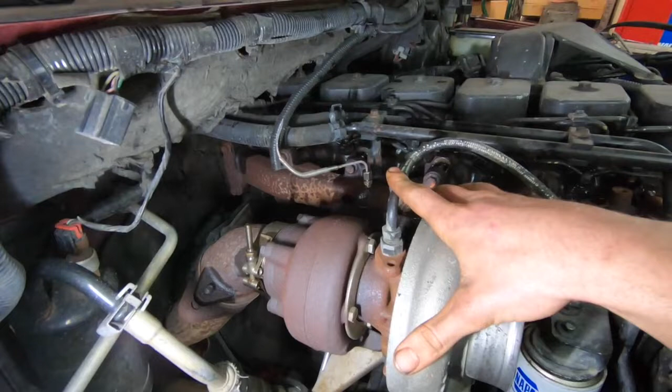So a couple things here on the turbo. We've got our feed line, and then our drain line down here that we have to take off. And then we have our V-bands here and here, I believe those are 11mm. We're going to take those off, and then I believe there are 13mm bolts that actually hold it to the manifold. Then we're going to unplug our wastegate and go from there.

Okay guys, first things first here, we're going to start on this side of the engine and get this turbo pulled off. In here we've got 11mm on these V-bands. Typically almost every V-band is 11mm, just for future notice. So we've got the 11mm down here and an 11mm over here on the exhaust. We'll start by getting those off.

Now that we got those off, what I typically do is take the clamps all the way off, the nuts all the way off the clamp. Makes it a lot easier to get them to separate. So we got our exhaust separated there, and we got our compressor side here. This is also O-ringed, so we're going to need a new O-ring for that. I also unplugged the wastegate off the bottom, it's just a little vacuum hose that pulls right off.

All right, so now we're going to break this 5/8 nut loose here on the old feed line, get that off there, and swing it out of the way. There's a little sealer washer in there that we're going to want to make sure we replace. Just swing that out of the way.

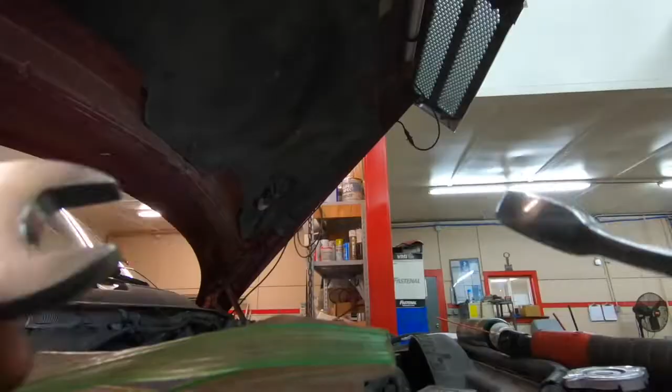So a little trick on these guys. This is actually a 15mm on these bolts that go into the manifold. Little trick here: you can hook your wrenches together like this, and it gives you some more leverage. So you hook your wrench together like that, bring it in here, hook it on there down in with your boxed end, and use the leverage of it to break it loose. Little trick there on them ones, guys, to help you out with those.

So we're going to get those 4 bolts off, and then we'll be able to pull the whole turbo off. So turbo's off. Make sure you guys don't forget we got 2 10mm bolts on that oil drain there, so take them off. I had to use a little pry bar to get it, the gasket was kind of brittle there. So like on anything with oil ports, man, plug them for sure, just to keep junk out of there. You got a rag here in the intake to keep junk from getting in there.

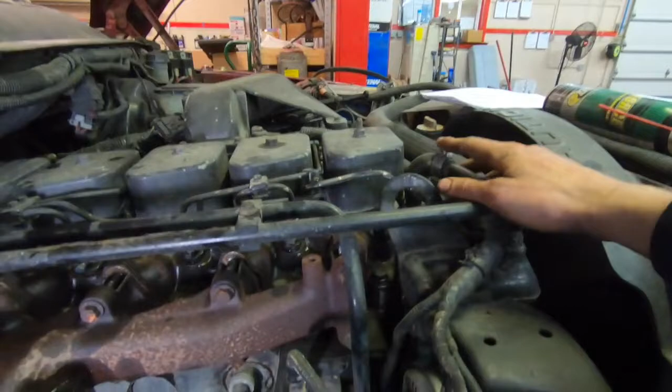So now we're going to work on getting these coolant hoses off. We got some hose clamps up here by the thermostat housing, and then we have some hose clamps down here as well, and then just 2 here. Then we can just pull the bolts off of this bracket right here that holds it to the manifold, and then we can pull those coolant hoses right off.

So a little trick here on these heater hoses, guys, to get them off: once you get the clamps off, take a pair of channel locks and grab the hose. You don't want to squeeze super hard, but get on the hose good enough and just rock the hose back and forth with the channel locks to get it to break loose. Now on these ones down here, you can't quite get a pair of channel locks to really get on there real good.

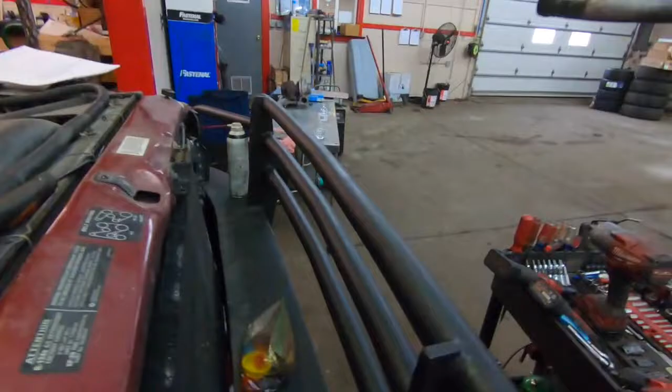So I just used a long pick with a 90 degree bend, and you can run it around the hose. Get it in there and run it around it a few times to get it to break loose, and then you can twist the hose and get the hose to come off just like that.

So just get something in there to work it out good and it'll be a lot easier. Channel locks work really good, or a pick if you can get it down in there, just make sure you don't poke through the hose. They just get kind of gummed up after being in there for a while and getting hot.

So we got that all off. There is a 10mm mounting bolt right here we got to get off. We got it off up here, so the heater hoses are done. Kind of push them out of the way, so now we got the coolant lines out of our way. We got our EGT probe out, it's a little 13 millimeter, I think 12 millimeter. We got that out of there.

So what I'm gonna do now is I started to try to break these bolts loose, and they didn't really look like they wanted to come very nice. I got a couple of them broke loose, but it was a little bit sketchy, so I want to put some heat on them. Instead, since I have to send this head out to the machine shop, I wanted to get the injectors taken out of it, so I'm gonna take these injection lines off.

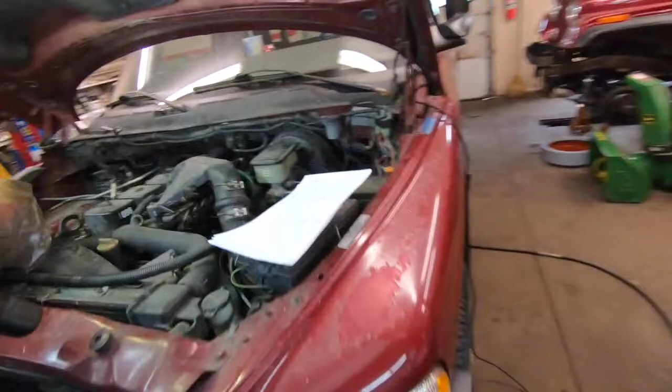The way we do that is we come over here, we're gonna have to pull our intake off. We got some 10 millimeters on this intake, we're gonna pull that off. We got our 11 millimeter here on our boot, pull those off, and then we are gonna unhook the battery.

We're gonna remove our grid heater, pull that off, and then we are going to break all these lines loose. They're 19 millimeter on all the lines, and then immediately we're going to cap all these lines on the pump, just to keep the dirt and crap from getting in there.

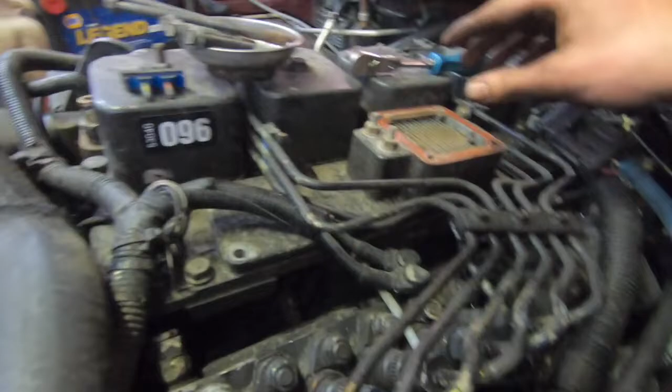Now we got the intake off, you can see what we're working with here. I got the two 10 millimeter bolts off for the grid heater, and then we have two 8 millimeter bolts for these little brackets right here that hold the lines to the cylinder head, and then two more 8 millimeter bolts back here.

Once we get all those off, we can go through and crack all of our lines loose and take the whole line setup off as one. Once we get them all loose on the injectors and over here, we can pull the whole thing off as one piece. Got all of our injection lines off, got everything capped.

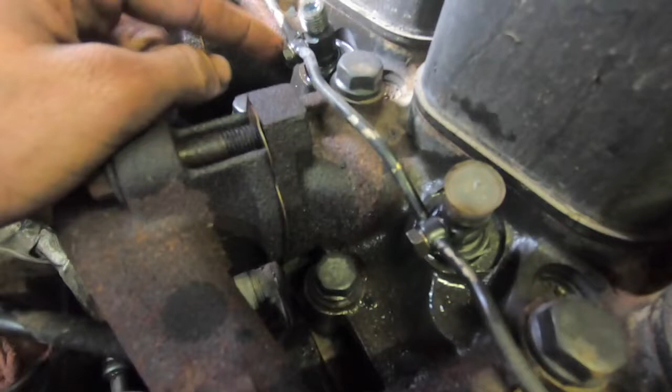Now what we need to do is go through and take all of our fuel return bolts out of the injectors so that we can get the injectors out. They're 10 millimeter there. There's a 10 millimeter bolt back here that holds that down, and it comes over here to this on the fuel bowl. We're gonna have to take this bolt out right here, and then we can pull the fuel return lines off.

So with the return lines off, we can now move on to getting the hold down nuts for the injectors off. It's a 21 millimeter, and as you can see on this one, I already got it out. You can see the nuts there.

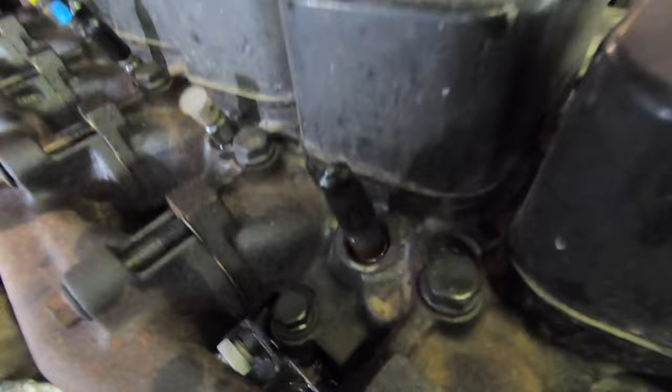First of all, let's back up here. I want to say start by capping all the injectors and then going through and cleaning off the area where they're at. This had a bunch of dirt and crap all over it, so I went through and cleaned all that off and blew it off with shop air. You can see how nice and clean all those areas are, to minimize the amount of junk that we get down in the cylinder. Then basically you take the nut off, looks like this, and then I have a special puller that I'll put on here and pull them out.

But what I'm going to do is spray some lubricant down in there and let it kind of soak. I might even let it soak overnight to try to help aid in getting them out, because they are kind of a bit of a bear.

So we'll get all these nuts pulled off of here. Big thing I can't stress enough, guys, is try to stay as clean as possible on this stuff and minimize any contamination in the injectors, because one little piece of junk can mess these things up. So the big thing is just try to stay as clean as possible. I know it's challenging on old dirty trucks like this, but staying clean is the biggest thing here. So let's get all these nuts off and go from there.

For those of you that might be interested, this is the kit in the Snap-on catalog, and these are the sets I have right here. There's the part number, it's CUMDS 12 valve, and then there's a CUMDS 24 valve for the common rail stuff. This is the kit here, comes with a nice bag. It's a really nice kit, comes with a compression gauge or compression tester and everything. This is actually what the stuff looks like.

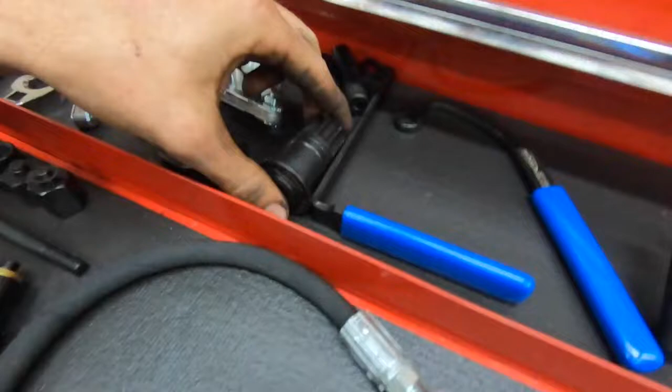This is the barring tool right here, for instance. 12 valve compression gauge adapter, common rail compression adapter, fuel rail caps to cap off the fuel rail for the common rails. We got feeler gauges, a pump gear puller, and this one you screw onto the injector, and then the other end screws into this slide hammer to pull the injectors. Really nice tool, makes it really nice and easy.

Like I said, that tool cleans the holes out, same thing for the common rails. There's a compression gauge for them that goes up to 800. Some crow's feet for the lines, this is a 19 millimeter crow's foot for the common rail fuel lines, to get them off. Really nice stuff, it's a really good kit. It's kind of expensive, but it's nice to have. So something to think about if you guys are starting to do a lot of diesel stuff. Really nice to have, and they work really good.

Alright guys, so now it's time here. We're getting ready, we're going to pull these injectors now. Something you're going to want to do first off is pull the hold down bolt nut off like we did earlier, I think it's 21 millimeter. Pull those off, and then what I did was I sprayed penetrating oil down in each one of these and let it sit all day while I was working on customer stuff. And now I'm coming back here at 5, I've soaked them probably 3 times now.

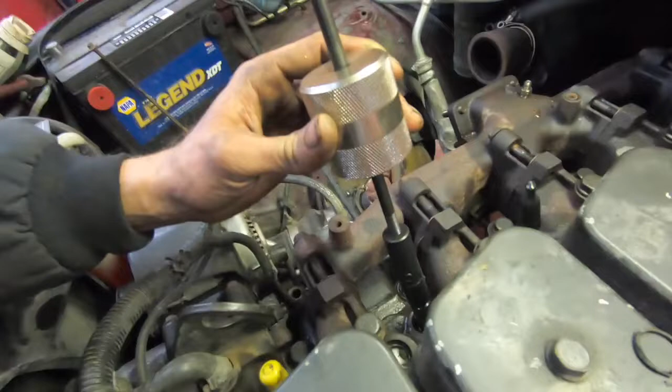What you're gonna do is use this special tool that really helps you out, it's part number CJ142, Snap-on job here. Basically it screws onto the top of the injector where the nut usually goes for the injection line. You screw this thing, set it on here, screw it in like this, and this is basically just like a little slide hammer. So it sits here like this, and then you just hit it like that. I already popped this one loose, it usually takes a lot more force than that, but then it pulls them out just like that.

So we're gonna go through and do all 6 like that to get them out of there. And then, like I said, make sure you're really clean with them and you put them on a nice clean rag on the bench somewhere out of sight, out of mind, and keep them capped once you get them taken off.

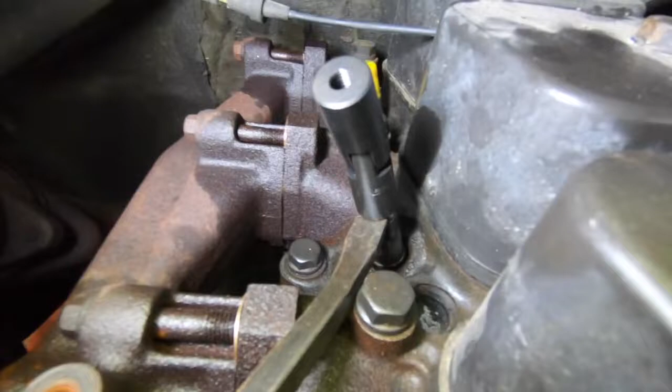Alright guys, so on this back one here, you can still get the slide hammer on number 5, but on number 6 you can't get the slide hammer on there. So I'm going to show you guys how I did it on number 5 here, it's a little bit easier to see. I screwed my adapter onto the injector, and then I took a pry bar and went right in here like this, got underneath the lip of it. You can see how there's a lip on this so you can grab it. So you put your pry bar right underneath that lip, and you just easily pry up, pulls it right out. So that's how you get number 6 out. Just screw that down on there, catch that lip with a pry bar, put the pry bar on the manifold, and just pop it loose.

So now all the injectors are out, I would suggest going through and just plugging all the holes, just so you don't get any junk down in there.

Actually, I decided what I'm going to do instead, guys, is on this manifold, I'm going to pull the head with the manifold, just so I can apply some heat better on the bottom ones. Once I get the head off, I can take it over to the bench and put some good heat on it to get to these bottom bolts. So we'll actually pull the head with the manifold on it. I'm going to use the engine hoist to pull it because I'm by myself, so we'll be able to get some better heat on there from the bottom side with it off.

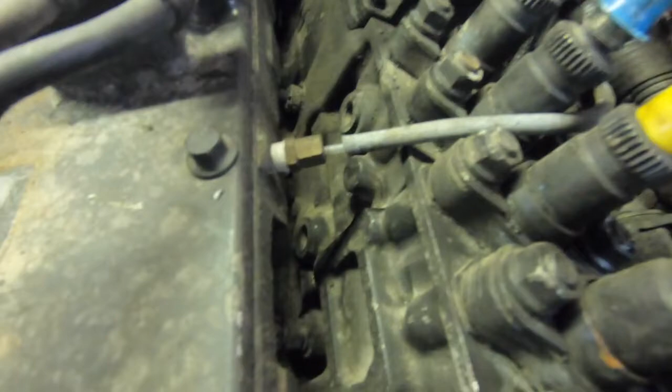So now what we're going to move on to doing is starting to pull some of this wiring harness off. There's a bolt here up front, a bolt here for the grounds, and a bolt right here for this mount. Then we're going to unplug this boost sensor here and a couple more things back here we're going to undo. Start pulling some of this stuff off of the cylinder head. We got our sensor here for our boost line for our boost gauge, and a couple of other things down here on the side. So we're going to move on and start getting some of this stuff off of here.

I'm leaving the valve covers on to the bitter end, just because I don't want to get any junk down in there if I can help it. So leaving them on until the bitter end. We'll take them out and I'll show you guys how to get the rockers and the push rods and everything out. So first things first, let's get all this stuff off of the cylinder head.

Start by taking these couple bolts off up here and moving this wiring harness out of the way. Okay guys, so we got two 15 millimeter bolts up here for these little grommets. Got them out. This is just a little clip, just goes down on here, you can just pull that up. Then we also have a 10mm bolt down here for this that we have to undo as well. So we got everything off the front of the cylinder head.

I also took the upper radiator hose off just to get it out of my way. I got my boost sensor off for my gauge. I got my other boost sensor for the AFC housing. Got that off, and I got the sensor in the intake here off as well. Got all that laid over.

We're going to take off those two 10mm bolts for the fuel filter housing, get that off, and then we're also going to take and put our serpentine belt tool down in here and take the belt off. And then the only thing we're going to do for this alternator is we're just going to take the bracket itself off to basically relieve it from the cylinder head.

Okay, so we got our alternator bracket off, and then I just looped this wiring harness underneath of the thermostat housing so it's out of the way. And back here, guys, we got our two 10mm bolts right here and here, and then we can slide our fuel filter housing out of the way.

But then you also have to take, there's two 10mm bolts on this hook back here on the back of the head. And you got to take this 15mm bolt out on the driver's side to get this little bracket off for the fuel lines, and then put that bolt back in so we can have a lifting device to lift this off of here. So two 10s and a 15 up there.

So now that we got all that stuff off, guys, we're ready to start pulling these valve covers and pulling push rods and rocker arms and such.

Something you guys are going to need is this tool right here, part number YA9565A. This is a Blue Point. It's a barring tool. On these Cummins, they don't have a single crank bolt on the front to be able to turn it over. So unless you have the adapter kit, I think Fleece sells it, that makes it to where you can put a 1/2-inch drive on it, you got to use one of these barring tools.

Down here on the passenger side, you're going to pull this plug out right here. Then you're going to install this in there, and you can turn the engine over with this barring tool. We're going to put cylinder 1 up on top dead center of compression, just so it's there and ready to go for when we go to put it back on.

The way you find compression is you put it up on top dead center, and then both valves, both rocker arms should be loose, meaning both valves are closed. So turn it over, get it up to top dead center, and make sure both valves are loose, both rocker arms are loose, and then you know you're on compression.

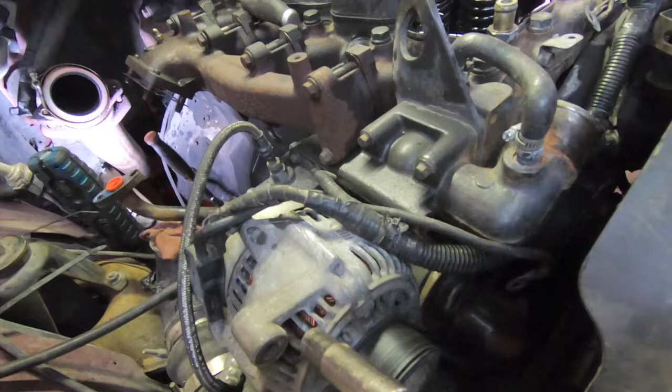Alright guys, so there's the barring tool in there. I just got a little 3/8 ratchet on there. For those of you guys that don't have a barring tool, you can use the alternator to turn the engine over, with the serpentine belt on it, obviously, to turn the engine over as well.

You can see here that both intake and exhaust valves are loose on cylinder 1. Like I said, you don't have to do that, it's just something I like to do. But we got these loose. Now we're going to take and unbolt our rocker arms.

Big thing here, guys, is keep all this stuff organized. When you pull your push rods out, keep them organized, because the rocker arms, push rods, and tappets all wear together with each individual one. So you want to keep all that stuff together. Don't swap push rods from here to there. Keep it all together and organized. Label things, do whatever you have to do to remember, just stay organized. We'll get these off, do that on all of them, and then I'll show you how to take the cowl apart so you can get the push rods out of the back.

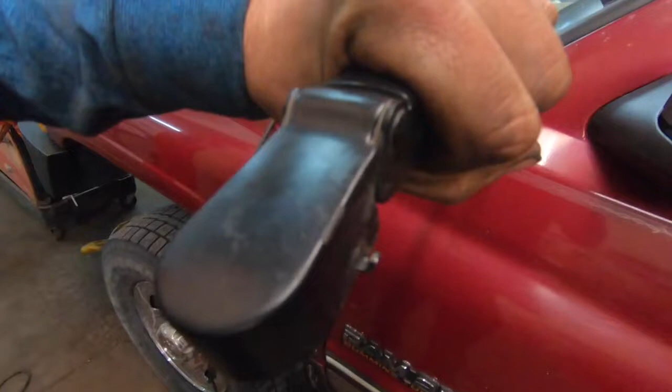Alright guys, the first step to removing this cowl is we got to get the wipers off, and I'll show you how. If you're looking at the wiper on the truck, it sits like this. There's a little tab right here, and you have to pull out on that tab. If you look in here, you can see this little catch, and when you push it all the way in, it hooks in underneath of the wiper transmission. So when you pull that out like that, it allows it to come off.

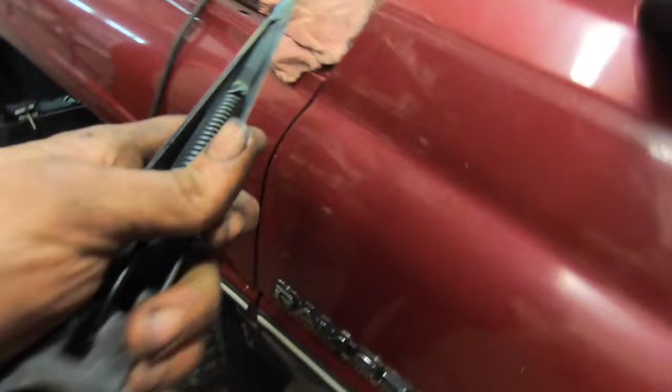There's a little tab on the side you got to pull off, and then it's pretty simple. Usually there's a rubber piece that goes right here, but this one's gone, so you have to pull that rubber piece off. There's some little Torx fasteners here, we'll pull them off, and then we'll undo our windshield washer hoses right here, and we'll be able to pull the whole cowl off.

Alright guys, so with the cowl off, there are some rubber plugs, one sits right here, and there's another one back there. Try to shine a light in there. Pull both of those plugs out, and you can grab the push rod here and put it up through there, like so, to get them to come out. Just like that. And there you go, pretty easy to get that off, no biggie. We'll keep moving forward here.

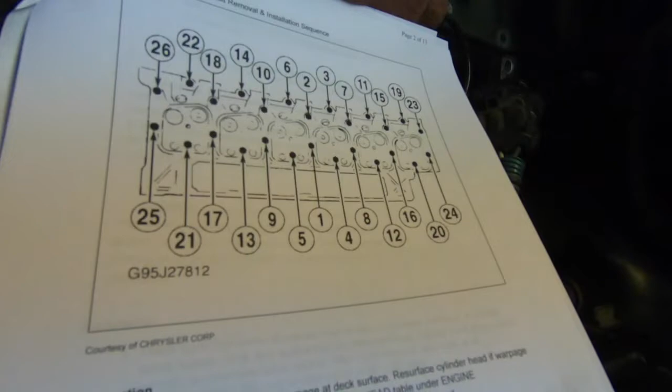Okay, so with all the rocker arms and push rods out, we are finally ready to start pulling some head bolts. There is a sequence to pulling the head bolts. Don't just start whizzing these things out, because you will warp the head. I'll put the sequence on screen so you guys can see it. As far as taking them out, basically you start in the middle and work your way around in a pattern like this, spiraling out to evenly loosen up the head.

I suggest doing all this stuff by hand, at least break them loose by hand, because these have been in here for a while. These are factory head bolts, so you don't want to break them off. Make sure we loosen them up nicely, and then you can run them out with the impact after you get them broke loose.

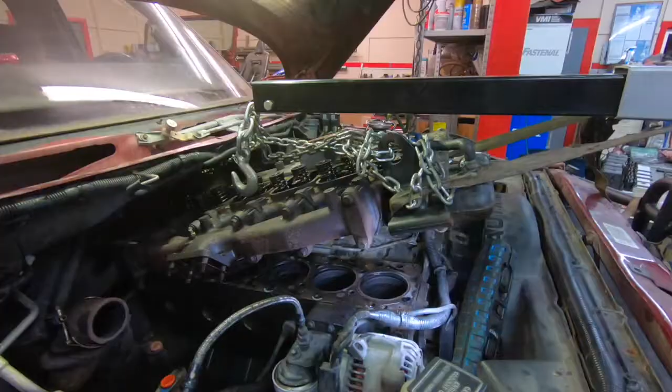So we got it off here, guys. Just going to go through and show you how I did it. I took a chain and went from, like I said, we left those mounts here and back here, and bolted it together.

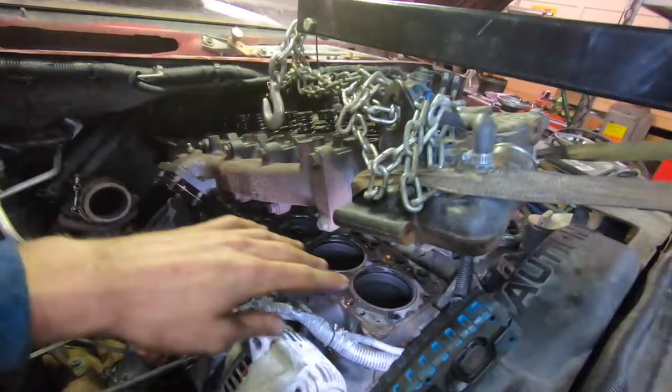Now what you're going to want to do is, instead of using the hook on an engine hoist, which I'd highly suggest using, because it'll slide, I bolted the chain right to the hoist so it couldn't slide. And then I used a ratchet strap, because you won't have enough clearance to get it out unless you tilt it. I'm by myself, so I don't have another guy to help, so I used the ratchet strap to pick the front of it up, and then it'll come right out.

The way I did that was I put a 5/16 bolt in through the head, which allowed me to hook a strap on this side, and then I wrapped it around and threw a head bolt down from up here to hold the strap in place. It actually worked pretty good. This is the way I usually do them, and then you can just take it right out, no problem.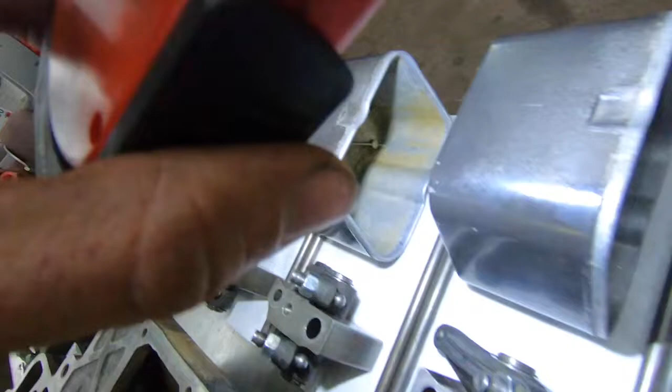So we got everything laid out here on the table. We got all of our parts nice and clean, everything looks good. We got the insides of the valve covers all cleaned up, everything's nice and clean. We got our reman cylinder head back from the machine shop with new valve seals, the valves have been lapped, and we also got the bottom of the cylinder head decked. Everything is good to go.

I got everything organized the way it came out of the truck. It's always a good thing to be over organized if you can, because it really helps when it goes back together—everything goes back in the same spot it was, so everything's happy there. We got our injectors laid out here.

What we're going to do now, the next step, is try to address cleaning up this cylinder head. This is the way I do it. I'm not saying this is the best way—obviously the best way would be to get it professionally machined, but nobody's going to pull an engine out just to machine it when they're doing a head gasket.

So what I do is use a soft bristled wheel—notice I said soft bristled, don't use a really hard one. You just want something to take the gunk off and clean it up. You don't want anything that's going to tear in and groove up the surface. You want this surface to basically stay as flat as you can get it, just take all the gunk off.

So I'm going to use this soft bristled wire wheel to clean this up, clean up the ringland here, clean up that ridge there, try to get some of that cleaned up. This thing's been sitting for a while so it's got a little bit of surface rust there—I'm not too concerned about that. We'll probably run a hone down it and just clean it up a little bit, get all this stuff cleaned up, and get ready to set the head on this thing.

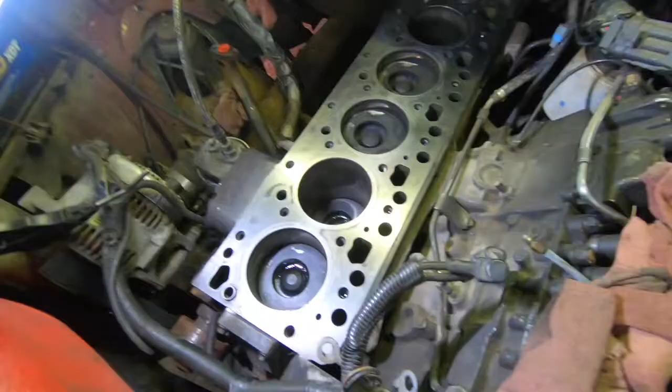So this is what it looks like after we get it all cleaned up—looks pretty good. Like I said, I used the wire wheel to get the majority of the stuff off, and then I came back with this. This is a really, really fine abrasive pad, but it's an ultra fine one, so it doesn't really scratch it at all—it just kind of levels it out. I put it on this piece of wood and you just go back and forth like this. You use the piece of wood to keep it flat so you don't round anything off. You just go over everything, get it nice and flat.

You can run it up and down like this. Got it all nice and clean.

Now what we're going to want to do is clean all of our holes out where our head bolts are going. You can see here in this hole right here. Let me get my other flashlight. See all that oil down in there.

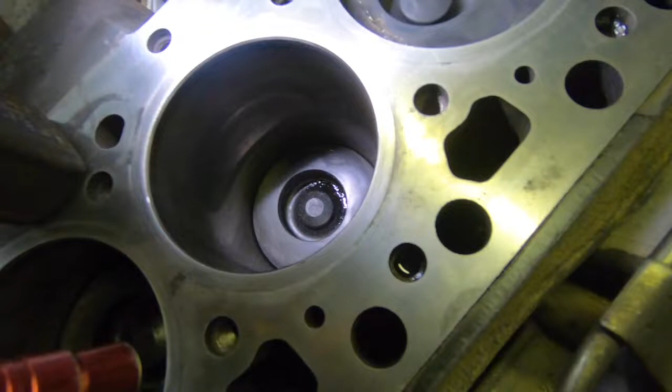We got to get all that oil out of there. So we're going to go around and clean out every single hole where the head bolts go into and make sure there's no oil in there, because you cannot compress a liquid. So if you try to put a head bolt in there and it's still got oil in it, you could run the risk of actually cracking the block.

So we need to go through and make sure on each one that we clean out every single head bolt hole, blow it out with a blowgun just like this, come in here and just clean all the junk out of it. Yeah, we're getting some oil out of them. Go through and do that on every single one. Even shoot a little brake clean down in there if you have to get all that oil out. Make sure those are nice and clean.

So we got all the holes blown out. There are, what, I think 6 around each cylinder. Went all the way down them and then came all the way back. Made sure they were all cleaned out real good.

This thing sat for a little bit, so it got some gumminess, and they get coolant and oil in there when you pull the head off. So I actually shot brake clean down in each one and cleaned them out.

If you have one come out hard when you take them out, you should definitely run a tap down them and make sure that they're not screwed up. If you have one that comes out real hard, which I have had before, you can run a tap down them and clean them out.

Now what I'd like to do next, I use this stuff. This is really good stuff. This is BG Products, it's a pre-lube. What I like to do with it is take and wipe some down in here on the cylinder walls, on the cylinders you can get to.

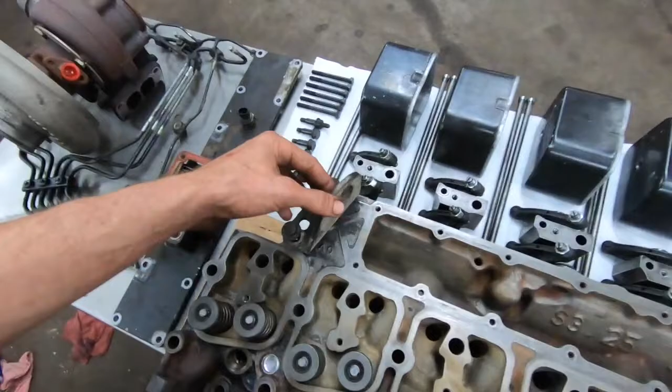We're getting ready to put it back together and get it back in the truck. So the way I like to do it is to install these lift hooks right here, just 2 bolts with the hook there. Then this thermostat housing, we're gonna have to get it cleaned up. I left it together so you guys could see it.

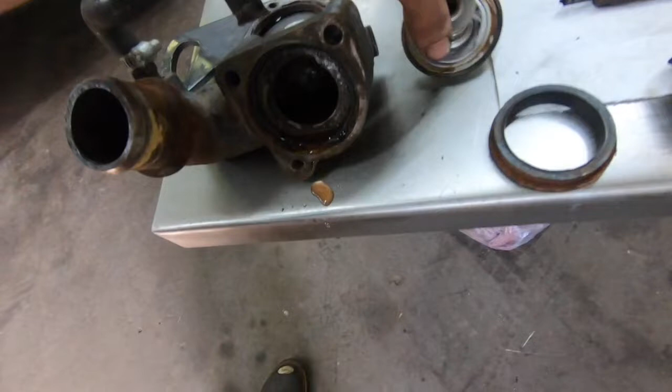There's a gasket right here, and once you pull your thermostat out, there's going to be another gasket in there. So I have my 2 new gaskets. This one is for the thermostat, and this one is for the other side of the thermostat.

We got to make sure we put our thermostat in the correct way. The spring part always goes out, this part always goes in, so it'll go in just like that. Then we'll put our other gasket on the outside, and our actual lifting device goes in between that and the head. We'll get in here, get this all cleaned up, get our new gasket in, get our new thermostat thrown in there, and get that bolted to the cylinder head.

Alright, so we got the thermostat housing bolted on here. It's 3 10mm bolts, and I'm kind of putting the head together before I get it in the truck, just what I can, so it's easier.

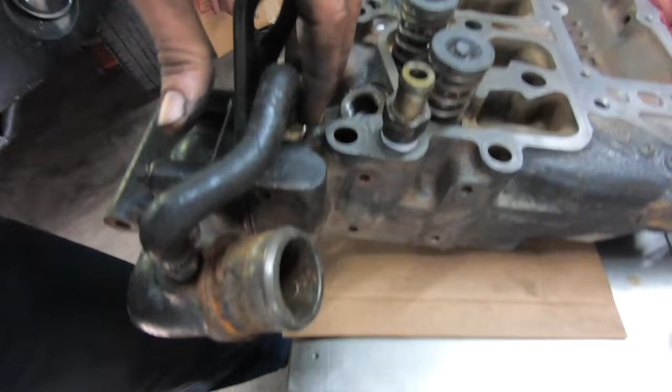There's 2 — if you take it to the machine shop, it's got to be completely bare, so we had to take these coolant bungs out of here. Just want to make sure we clean the threads up and put new thread tape on them. Both of these are 7/8 sockets. Just tighten them down until they're nice and tight.

This is a 7mm bolt right here on this clamp, and then we also have another one here in the back. This is an 11/16, this is your coolant temp sensor. So we want to make sure we get all those in there.

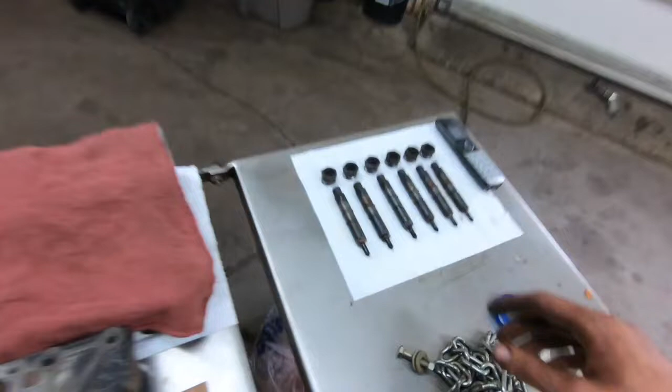I also have this tool — this is a good time to do this while it's off. It's a Blue Point, part number MB6BTA. Basically it's like a wire brush, kind of like you'd clean your battery cables with, but it's actually for the injector holes. The injector holes, as you can see on the injectors, get kind of rusty after they've been in there for a while. This tool twists down in there like this, cleans the hole out, and goes all the way through to the bottom side, cleaning that hole out really nice and allowing the injector to go in easier than if you didn't have that.

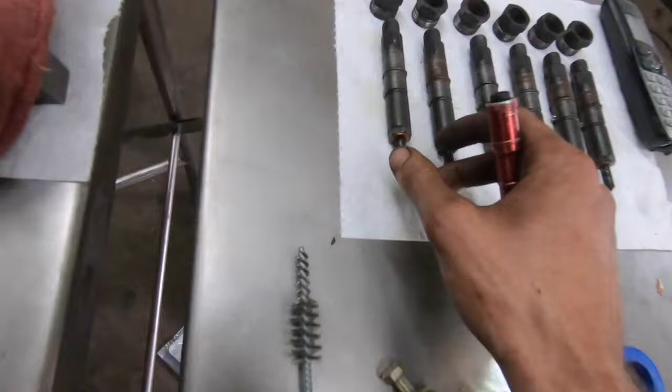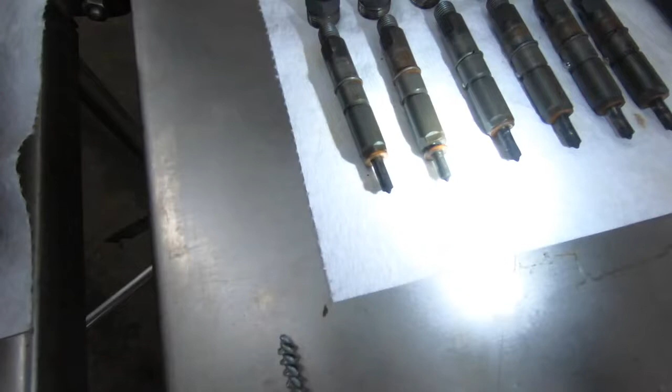It also cleans out the bottom of the hole where this copper crush washer on the end of the injector actually seats against, and you want to make sure that's really nice and clean so it makes a good seal. This is what I'm waiting for right now — these copper crush washers. They're pretty expensive, like $10 a piece, but you definitely want to replace them. They're kind of a one-time use deal, and that's what actually seals off the injector.

Basically we got the head pretty much ready to go in the truck. We're going to leave the injectors out of it so it's easier to crank over when we're trying to get everything adjusted. We got our 2 15mm bolts here on the back for this bracket, and like I said, our 3 10s up front. So we got both of our hooks, we're going to run a chain across here, bring our engine hoist over, hook the engine hoist to it, and then we'll get ready to get it in the truck.

So we got it rigged up here on the engine hoist, guys. You can see the bottom of our head here is all machined and looking nice — everything's good there. I want to go back in here and double check our head gasket, make sure nothing's moved, nothing's weird. Double check all of our holes, make sure nothing's down in the cylinders, and we'll start getting ready to get this thing in there.

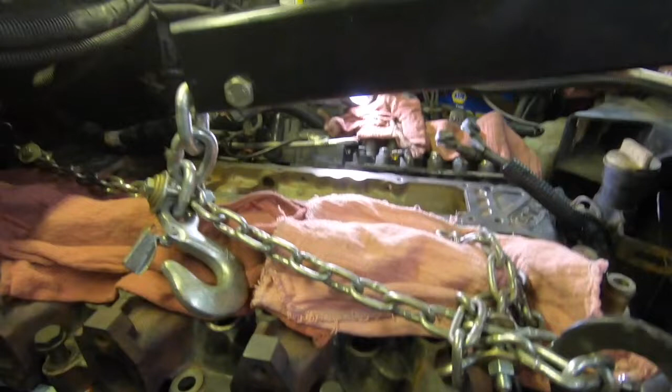These are the old ones, but you can see here I threw a couple exhaust side studs in, and then some up top, and then you can basically just set it down and the bolts will kind of guide it. Leave it up half an inch or so from the actual head gasket, and then you can put some bolts in there to help guide you down, because it's really kind of hard to see at all angles. So put some bolts in there to help set the head back down, and then once you got it back down, we can unhook all of our stuff here off the engine hoist and get this stuff out of our way and move on to the next thing.

Okay guys, so we got this head on here. Now what we're going to do is start installing the head bolts. On this there's 3 different lengths of head bolts. We have the small ones that go in here by the exhaust housing, and then we have 2 sets of bolts that go right here, and then we have the long bolts that go right on here where the rocker pedestal sits. So here on the bench I'll show you what I'm talking about.

So these are the long bolts here. They go in our rocker pedestals, through the pedestal, through the head, and into the block. And then these ones here are the ones that go in the middle, and these go out by the exhaust housing. So we're just going to get all of our bolts in there and started. We're going to start with these, and wait for the long ones until we install our rocker pedestals and push rods.

Okay guys, so we got all of our head bolts started here. We got the small ones, and then the 2 medium ones here and here, all the way in, just getting them started. And then what I did was put some assembly lube on all the tops of all the valves. The next thing we're going to need to do is put our push rods in.

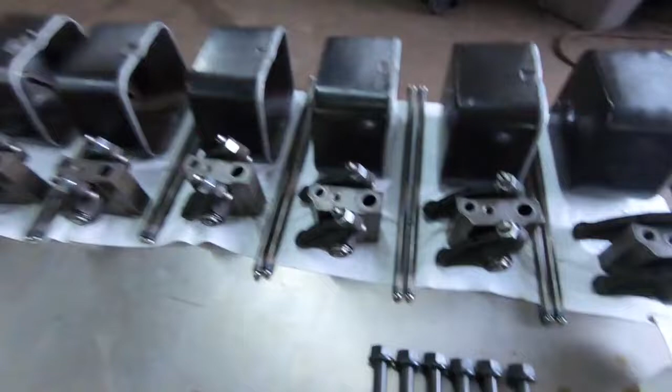Here what we're going to do is just grab a push rod. This is number 1 up here. We're going to take and just dip them in the assembly lube, get a little bit on the bottom of them, just like that, and take them up and drop it down in here. Just like that. We're going to put all of them in and make sure they're all the way down in there.

Then we're going to lubricate the top of them, and then we can set our rocker arms down on top of there so we can get those studs put in. So lubricate the push rods, put them in there, make sure they're fully seated, put lube on the top of them, then set our rocker arms on there, and start all the bolts. Just get them started, and then we'll come back and start the torque procedure.

Another thing here too guys, is we're going to loosen up all of our studs here for the push rods. We're going to loosen those up so that we can fit the rocker arms on there, and they don't try to start compressing the valves. We just want to loosen them up so they go on there real easy and we can get these torqued well.

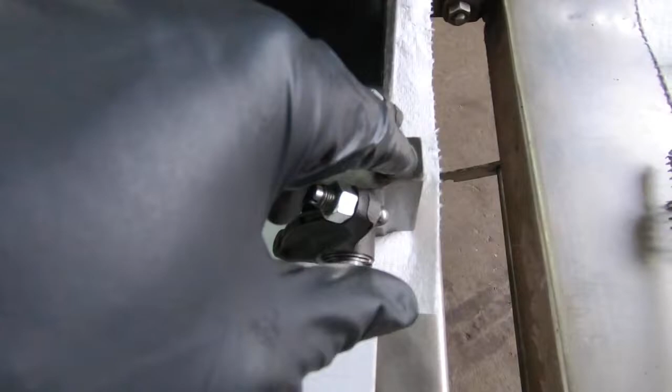Okay guys, so we got our rocker arms on here and the bolts just started. They're still loose. But what we're going to want to do now is come through and break all these nuts loose on these adjusters and run the adjuster all the way out, loosen it all the way up, so that you want to make sure this sits flat on here. There's actually a little step to it, and it sits down in there. So I'm going to loosen all these up - see, this one's kind of hanging up like that - so that they sit flat on here and we can get a good torque out of these. So, 14 millimeter, break all these loose, and then a flathead screwdriver to run these out, and we'll get them all ran out of there and get started on getting this torqued.

Okay, so we got all of our rocker arms loose, guys. We backed all of our adjusters off. We got all of our bolts. I just ran them down till they touched basically everywhere, and then we're gonna pull up our torque sequence, which you can get off of Mitchell. I'll actually throw it in the end of this video.

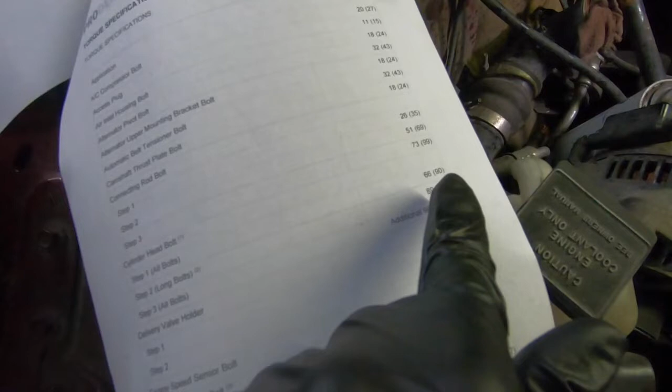The first step here is we're going to torque all the bolts to 66 foot-pounds, and we're going to do it in this sequence right here. Kind of line it up, put it down here where you can see it, line it up with the way the engine's oriented.

And we'll go through and get all these things torqued down. The way I do it is I go through and torque it, and I get a paint marker out. My first stage, I'll just put 1 line, and then when I come back in my second step, I'll put 2 lines, and then the third one, so I can keep an eye and remember where I'm at when I'm torquing. Because sometimes with 26 head bolts, it gets kind of confusing, so I always like to mark it where I torque them so I know where I'm at.

Just keep an eye on your orientation of where you're going from, and we want to make sure we do it in the sequence so that the head gets torqued down flat and everything's nice and straight. So we'll go through here and torque these to 66 foot-pounds, and then the next step we'll move on to after.

And when I did that, I put a mark in it, so I have a dot on my exhaust ones, and a line on these to show that I've torqued them to the 89, and then we'll come back and put a cross in them when we're all done. So now we'll come back, take everything another additional 90 degrees in the sequence, and we'll be good to go.

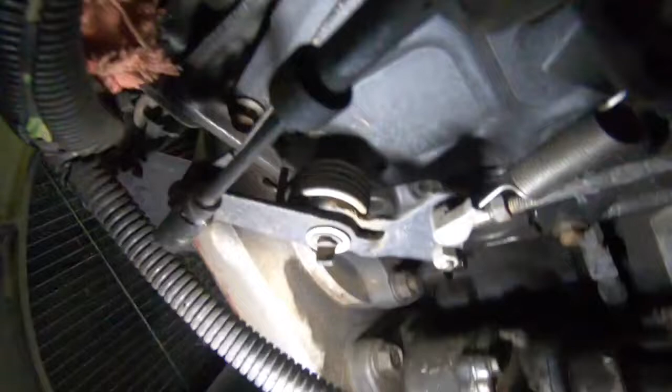So first things first, to set our valves, guys, I want to show you this down here. This is kind of an important piece of this. Right down here, let me get my light in the right spot, is a timing pin. It's right on the driver's side, right above the vacuum pump here. It's this pin right here. It goes in and out, you can push it in and push it out. See how it moves right in here?

So there's a detent on the cam gear as you rotate it over that this will fall into, and you just want to push it in while you're rotating the engine over, and then it'll click in, and then you know you're on top dead center. So this is how you find top dead center.

Unfortunately on this one, whoever worked on this before broke the end of the pin off. Pull it out so you can see it. That's what it looks like, and there should be a little stud on the end of this that goes into that cam gear, and it's unfortunately broke off, so this is no help to us, but it's not a big deal. There's many ways to find top dead center.

You can stick a dial indicator down in here in the delivery valve. The easiest way I've found to do it, kind of backyard Bob way, is I just stuck a pick down in here in the injector hole, and crank the engine over till it came all the way up to top dead center.

And then what you want to do is make sure that these valves on cylinder 1 are loose. What this means, the rocker arms per se - when both of these arms are loose, both valves are closed and we're on compression. So we want to make sure both valves are completely closed and we're on TDC of cylinder 1. Now we're going to go through, and when we get to that point, we can adjust the valves corresponding to that.

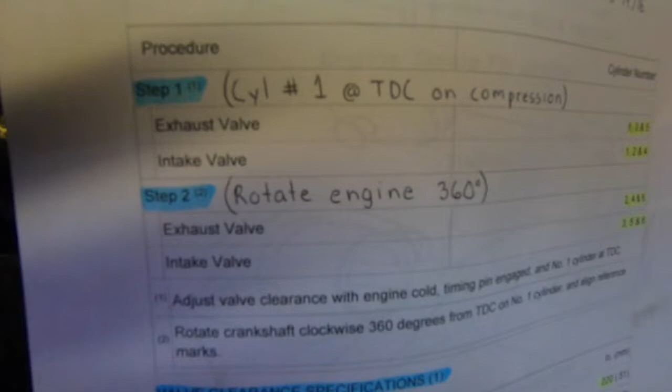So with cylinder 1 on top dead center of compression, we're going to go through two different steps here. We're going to adjust the intake and exhaust valves at the same time, but there's certain ones you want to adjust. On step 1, with cylinder 1 at TDC, we're going to adjust the exhaust valves on cylinders 1, 3, and 5, and then we're going to go through and adjust the intake valves on cylinders 1, 2, and 4.

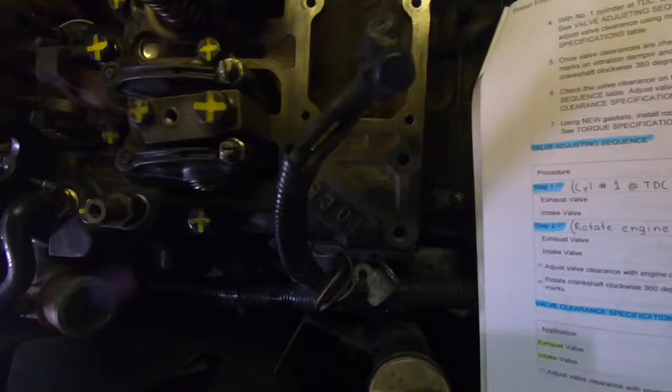So when you're looking at this, this is going to be your intake valve right here up front, and this is going to be the exhaust valve. So we're going to do 10 thousandths on the intake valve and 20 thousandths on the exhaust valve.

So here we are on number one, and we're doing both on number one. Right now we're on the intake, and what we're going to do is take our feeler gauge, put it all the way in till it's nice and centered. I already got this one adjusted, but put it in there until we're nice and centered.

Then what we're going to do is take our screwdriver, put it on there, and tighten this down just until it hits. You don't want to crank it. You'll feel it when you start to tighten it up, and it'll just hit a spot where it kind of bottoms out. Then we're just going to want to tighten up this 14mm wrench.

And then what you should feel when you pull it out is a slight drag, like that. You can kind of feel a slight drag on it, and that's what we're looking for, guys.

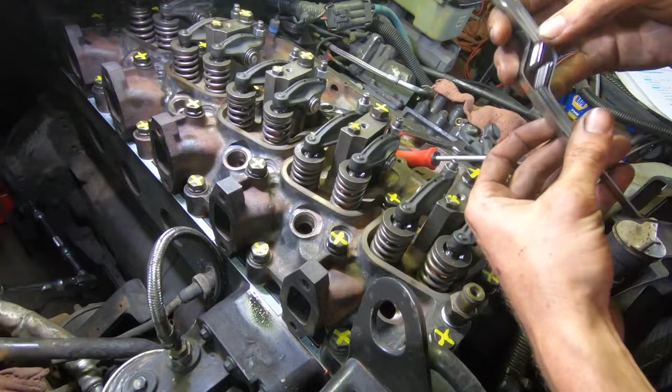So what we're going to want to do here, this is our exhaust, so we're going to want to go to 20 thousandths on our feeler gauge, which is right here.

We stick our feeler gauge in. It doesn't quite want to fit in there, so we've loosened it up a little bit, get it in there, run it down till it touches, and take a 14mm wrench in there, and you kind of want to hold the screwdriver against the wrench as you're tightening it up.

Like I said, when you pull it out, it should be kind of a nice slight drag. When you put it in there it should go in like that, and a nice slight drag when you pull it out like that.

So we're going to go through and do all the valves I talked about. Once again, we're doing exhaust valves 1, 3, and 5, and intake valves 1, 2, and 4, and then we'll go on to the next step after that.

So with everything adjusted, we're going to come back and tighten our rocker lever adjusting nut to 18 foot-pounds on all the ones we just did. And then we're going to come down here.

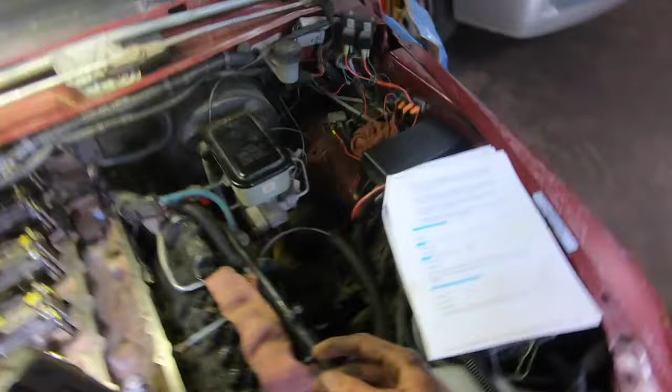So at this point, guys, after our first step on these valves, normally what you're going to want to do before you rotate the engine is make sure you double check that timing pin down there, that you got that timing pin pulled out. Otherwise you'll break it off like this one, and that's probably what happened here.

So make sure in between step 1 and step 2, before you rotate this engine, that you pull that timing pin back out, and then you're just going to rotate it back around until it pushes back in. Then you know you're back on top dead center again. For our instance, since ours is broke, we're just going to mark the crank, and then we're going to rotate it back around.

Alright, now that we're done with that, guys, we got all of our rocker arm adjusting nuts torqued to 18 foot-pounds. We're pretty much done as far as the valve train goes. Everything's pre-lubed. What we're going to do is put some squirts of oil on these rockers just to lubricate them. Take some 15W40 and put some oil on these to help it with startup until it builds oil pressure. We have our injectors out of it, so it's easier to rotate over. So we'll get our valve covers put on, and then we'll get our injectors, start getting ready to put our injectors in.

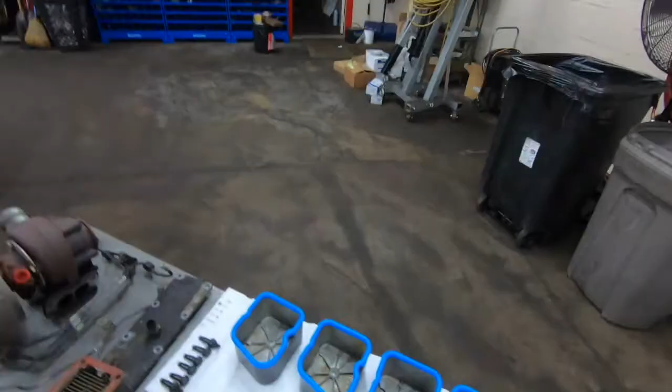Now we're moving on to getting the valve covers ready, guys. There's 2 things we got to do here. Obviously put the valve cover gaskets on. I went through and cleaned the inside of every one of the valve covers out. It was kind of just dirty from the typical diesel oil stuff, so we got all those cleaned up, and then there also comes with these O-rings for the bolts themselves, so we're gonna want to get those on as well.

But before we actually put the valve covers on, something I always like to do, just to be safe, is rotate this engine over 720 degrees, which is basically 2 revolutions, just to take it all the way through its cycle, just to make sure that none of the valves are hitting or anything like that. If you follow the procedure I took you through, you should be fine, but just for peace of mind, it's always nice to rotate the engine over twice just to make sure everything's cherry.

With the injectors out, this thing should rotate over with no problems whatsoever. If you run into a problem where the engine won't turn over, definitely don't try to horse it. This thing should go - literally I had a 3/8 ratchet on there just doing one of these. So the thing should rotate over super easy. If it doesn't, you have a problem - stop, don't try to keep rotating it, because you'll end up bending something, bend a push rod or something like that. So figure out what's going on with it, loosen these back up, figure it out, readjust things, and then try it again.

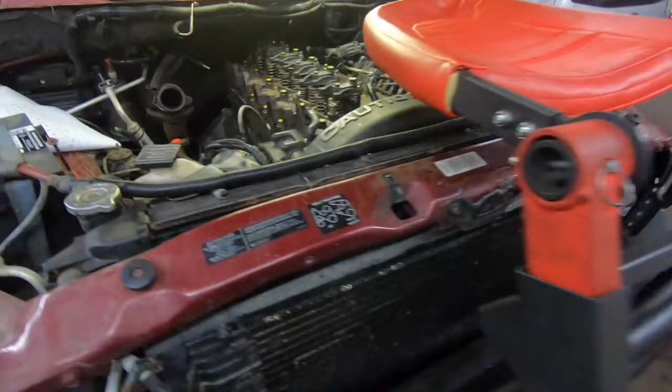So with our engine rotated 720 degrees and our valve covers ready to go, we'll get those put on, get the top end of the engine sealed up, and we'll move on.

So valve covers are on. I just started them. Normally they have a cover that goes over top of this, so these studs, you gotta line the studs up with where they go in the cover, but this one, the cover's gone. So we're just gonna go through and torque these to 18 foot-pounds. Just run them down nice, and get them close with your impact so you're not ratcheting for 3 days. Get them close and then just come through and get them all nice and tight.

Alright, so those are all torqued there. Everything's good to go there. So valve covers are done.

Now we're going to move on to getting our injectors ready to go. You can see they kind of got a bit of rust there where the retaining nut goes. I want to make sure not to get any junk in the return line. So just kind of get it in here and just... Ideally, you should have these injectors capped. I don't have any caps though, so I'm just paying attention to making sure that I'm not getting any junk in there.

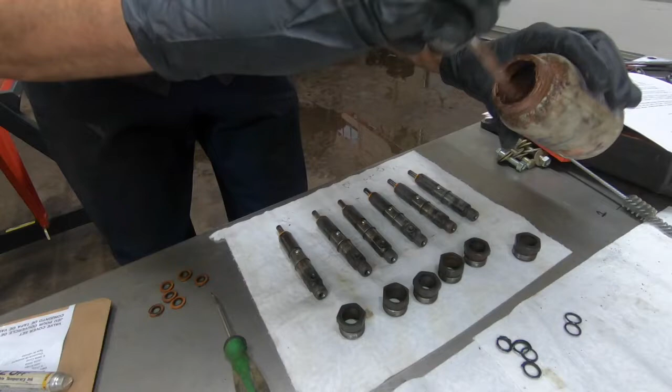Okay guys, next here on these injectors is where we cleaned it up. Right in here is where that nut's going to go. So you want to take and put some anti-seize on there just to keep the nut from seizing to it, and it comes out a heck of a lot easier next time.

Right there like that, and then what we're going to want to look for is there's a notch in the cylinder head. We're going to want to put this detent ball in that notch, and it helps line up the injector when you put it down in there, and then you just push down and it'll snap in.

Alright guys, let me try to show this to you here. This little detent, see if you can see it, is right there. See that little indent in the head? So that's basically where you're going to line this up with right here, that little detent right there.

Just kind of hold up on the copper crush washer, keep it up like that to where you can get it in there, and you'll feel it sit like this, and then once you get it in that detent, it'll kind of drop down in there, and then you know you're in there square. So that's what you're looking for.

And then basically you just take your hold down and put that on there with the new O-ring, and then you're good to go.

So we're getting ready, we've got the manifold chucked up in the vise here, guys. What we're going to want to do is just take a real soft tool, nothing that's going to take a bunch of metal away, just something that's going to take the little bit of soot and carbon and stuff that's on there. Just something to take that off.

Just like that, guys, that's what we're looking for. We want to try to keep this plane right here as flat as possible. Ideally, the perfect scenario would be to plane it on a planer or something like that, but we don't have that here. So just clean them up good and do the same thing on the cylinder head, and then we'll get ready to throw this manifold on there.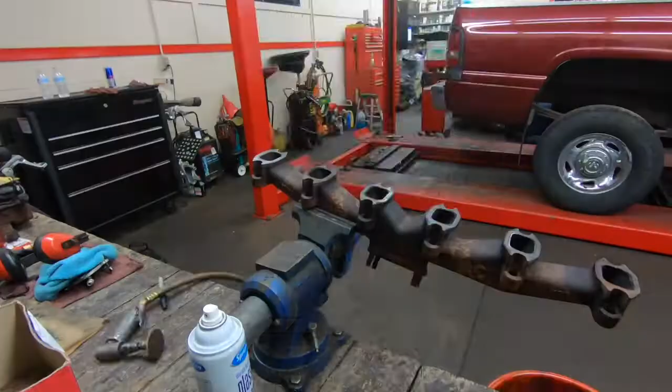So we're ready to install the manifold. What I did was took all my bolts over to the wire wheel and cleaned them up. Double check and make sure that they go in the head real nice. Run a tap down if you have to clean them up. These ones were all pretty good.

Make sure we get our new exhaust manifold gaskets, and then we'll bring our manifold over and start throwing some bolts in it, and we'll tighten it down to 32 foot-pounds. There is a sequence, and I will show you how to do that as well.

So what I like to do on this is just take and start the bolts with your gaskets on there. These ones got a little bent up in the packaging, but it'll be all right. Just kind of get them started in there so that when you go to set the manifold in, the gaskets are already there, and basically it kind of lines itself all up. It's a lot easier than trying to sneak the gasket in there and get it started.

So get all 6 of them lined up on there with the bolts in it. Just start them and then make a couple of them longer where you want to start first, and then it'll go in pretty easy.

Alright, so we got our manifold on here now, guys. We got all of our bolts started. So we're just going to go through and start in the middle, just kind of work our way out. Just run them down, you don't have to kill them, just get them run down.

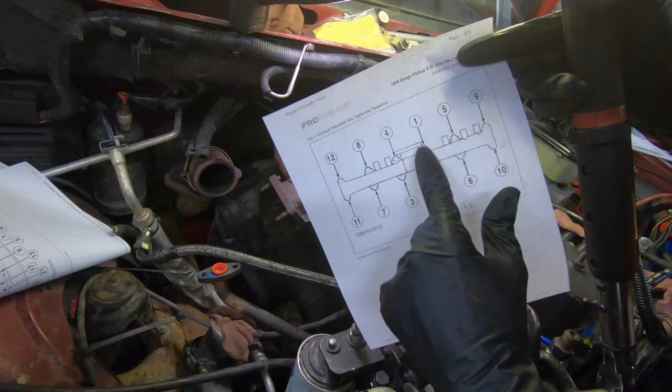Alright, now we're going to come back through and go 32 foot-pounds with our 13 millimeter socket. Here's the procedure: we're basically starting in the middle and working up and down as we work out, to try to bring the manifold in easily and square.

Once we got our first pass done, guys, we're going to want to go back and hit them again. The manifold always gets a little warped from the heat and stuff, so you go through and torque it. This was torqued to 32 foot-pounds, and you can see here we're not there, so we got to go back and hit them again. Just double check them all, and sometimes you got to do it a couple times just to make sure you get them all torqued down to 32 evenly.

Okay guys, now we're getting ready to install a turbo. We got our new gasket on here, both of our flanges cleaned up, and a new gasket going here on the drain line. Then we got 4 nuts to secure it to the manifold. It's really nice if you have a helper to help you throw it in there.

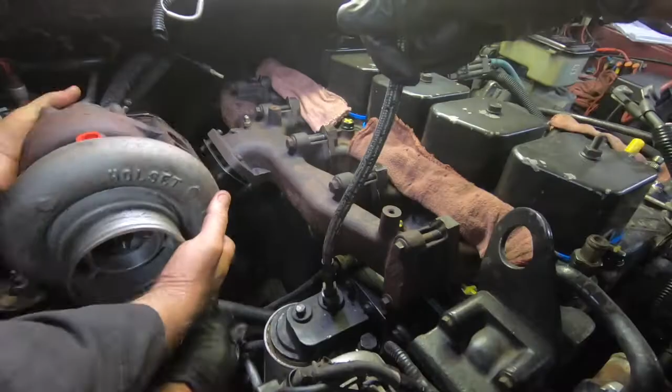Once you guys get it on there and get the bolts started, it's a 15mm. It's just kind of a tedious process. You just gotta get in here and snug them as you can, try to bring them down evenly, just like the manifold. Get the ones up, kind of alternate where you're tightening at, just to get it brought in evenly, so it crushes the gasket good.

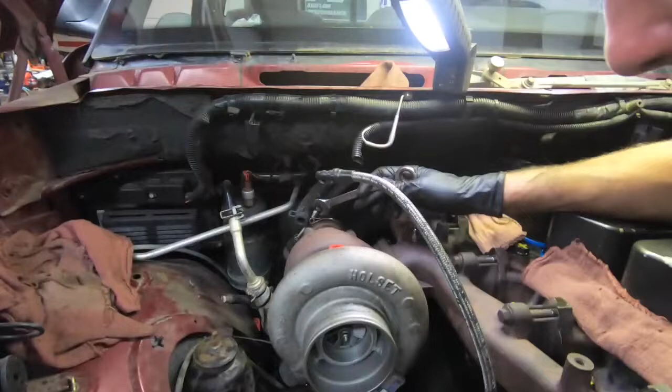Like I said, it's kind of the slow boat to China, but there's really no way to get a good torque number on these, so just get them nice and snug. Then we'll get our oil feed line in here, and our oil drain line on the bottom, and get our intercooler pipe down here hooked in with the new O-ring, 11mm on that clamp. Same thing back here on the exhaust, we'll get our clamp back here, that's also an 11mm, and then we'll be pretty much done with the manifold.

We got to put our pyro back in, which is right here. That goes down in there, tightens in right there. Other than that, we're pretty much good with the turbos.

We're gonna move on to now putting the return line for the injectors back on. You should get new copper crush washers to go with them on these ones as well. They kind of look like a hook, and they slide down over the bolt. So new ones of those, and we'll get them put in and torqued to spec all the way down, and then it goes around back here into our fuel bowl right here, and then the bolt for the intake holds that bracket right there. Get all of these put on, and then get ready to put the intake and the injection lines on it.

So now all that's on there. These are 10mm here on these return line banjo fittings. We have 6 of them obviously, and then there is a hold down bolt right here for that bracket on the intake, so we'll wait to tighten that up till we get them all in there. And then this fitting right here on the top, new seal or sealing washers there as well, and that is a 12mm.

So now what we'll do is we'll take and we'll lay our injection lines in here, get them hooked up to our little brackets here, and just finger tighten them to start with, and then we'll come back and torque them. So we got our lines on here, we have them clamped down, all of the nuts are started. We just want to make sure we got them on there and threaded real good.

All right, everything's torqued there. We're gonna move to the back here. We're gonna lay our wiring harness in, plug our APP sensor in, and put our harness back where it's supposed to be on that little clip. Get that all sitting nice. We'll zip tie these vacuum lines up and get that routed a little better.

And then we have our two grid heater lines that we have to run as well. Up here we got to hook our two grid heater wires up, little 10mm nuts. Tighten them down, we'll be good to go.

Okay guys, so we got our intake on. The actual torque specification isn't as much as you think - it's 72 inch-pounds on these clamps. Same thing over on the exhaust and the compressor side of the turbo.

So I started running some of this wiring. I actually ran into a problem where I had this harness routed incorrectly, and I had to take the thermostat housing back off because I had it underneath. So make sure you have this wiring harness up above the thermostat housing, and then you got a 15mm here on this bracket and a 15mm down here on this bracket, and then you also have a wire coming from the alternator, this one right here, that goes right down.

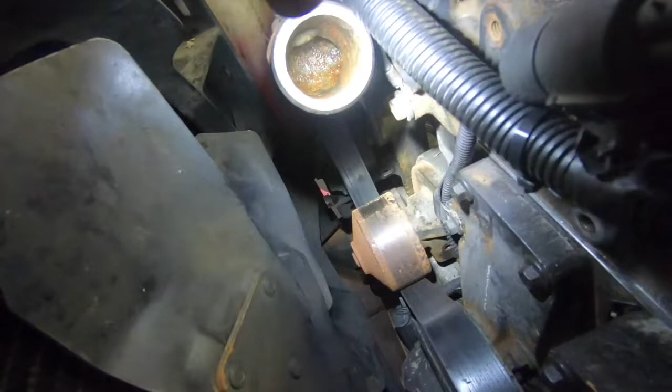Underneath here - see if I can get some light on it for you. Goes right there where that bolt's at. So right there is where that alternator wire goes. And then we'll just get it all nice and clean. I kind of have OCD when it comes to this stuff, making sure everything's nice and neat.

We will get our alternator bracket put back on here. And then I got all of the injection lines just snug with a wrench - these are 19mm. I got them all snug with a wrench. We're gonna have to crack them loose to bleed the system anyway, so I didn't really worry about it too much. We got our 10mm tight on our grid heater there.

Next thing I think we're gonna do is get our thermostat or our coolant lines here for the heater core. We're gonna get them ran. There's bolts that go into the manifold right here to hold it down, and then we have one hose right down here that it'll go into. So we can get that put on there, and then we will get the radiator hose on and start getting ready to bleed this thing.

So for the bleeding procedure, guys, I have a vacuum bleeder. Basically, it pulls all the air out of it. I'm sure probably a lot of you guys don't have something like this, so what you can do is just put coolant in it and leave the radiator cap off. Once the thermostat opens, it'll gurgle out of there. But this thing, pretty slick tool. If you guys do a lot of stuff with cooling systems, it's definitely a really good investment.

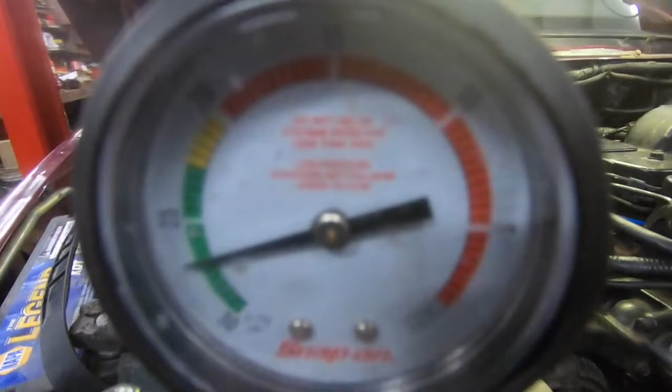Basically what you do is it's got a gauge on it, and you just suck it down like this. Pulls a vacuum on the hose, collapses the hoses, pulls all the air out of the system. But then it also doubles as a tester too, so you can shut the valve off and see if it holds vacuum, which obviously it is, so that's good. Then it's kind of a check to see if everything's tight and right. And then basically all we're gonna do is sit here and put this end in our coolant and turn that valve, and it uses a vacuum to draw the coolant in. Pretty slick tool, man. If you guys are interested in this, just let me know. I can send you the information about it. It's a really nice tool.

And so we got the cooling system bled. We're gonna just let it sit for a minute and make sure everything holds pressure. I got the alternator on. At this point, guys, it's worth just giving everything a good once over, making sure everything's tight, making sure you got everything plugged in, make sure you got the coolant temp sensor down there in the back of the cylinder head. It's kind of hard to get to. Make sure you don't forget about plugging that in.

Other than that, we got pretty much all of our wiring ran and zip tied where we need it to be. We're pretty much ready to put some oil in this thing and fire it up. So we'll let our cooling system sit for a bit, we'll fill it up and we'll get ready to start this thing.

It's going to be hard for me to get a video of it here, but down here is a primer pump that you need to push, like this. Just push this pump. Where is it here? It's right behind here. There? If I can find it. Right here, you guys see this right here?

So we're just gonna pump that, just like that, while you got that bleed screw open, and that will push the air out of that bleed screw. You want it to be a nice steady stream coming out of that bleed screw, and once you get a nice steady stream out of there, you know you got all the air out of the system.

So now we'll try to go around and crank it, with the lines broke loose on the pump. Since we had air back there, we'll break these lines loose on the pump, get the air out of here, and then we'll go back and get the air out of the lines over there. We kind of got to work ourselves from the fuel bowl through the pump over to the injectors. So let's try that.

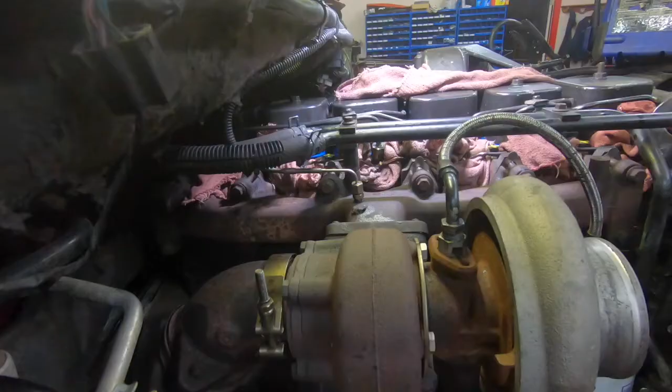Alright guys, moment of truth here, we're gonna try to start this thing. I think I got enough of the air bled out, she might start, so let's give it a try.

Nice and quiet, we got them valves adjusted nice. Sounds really good.

At this point, guys, we're going to want to look for leaks, check to make sure nothing's leaking. Pull our rags out of here. Inspect to make sure nothing's leaking - that's the big thing here.